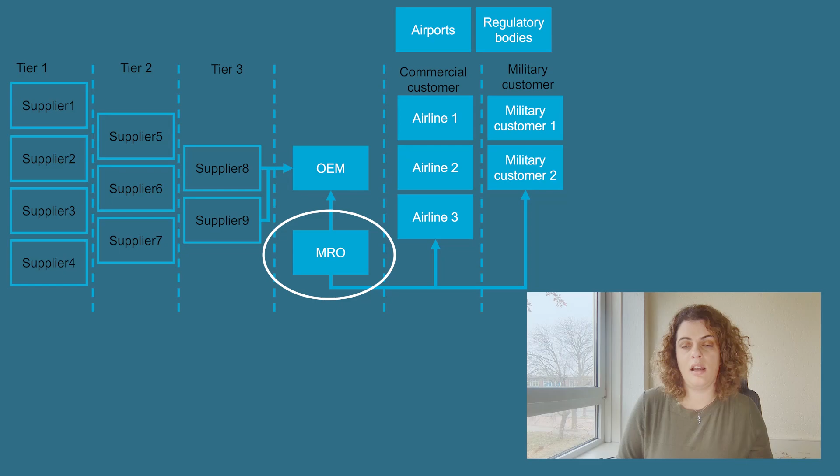In addition to these organizations, we also have the MROs, the Maintenance, Repair and Overhaul independent parties that perform maintenance. Maintenance can be performed in different places, such as by the supplier, sometimes by the OEM, which is not so often, and also the airlines can take that responsibility, as well as the military customers.

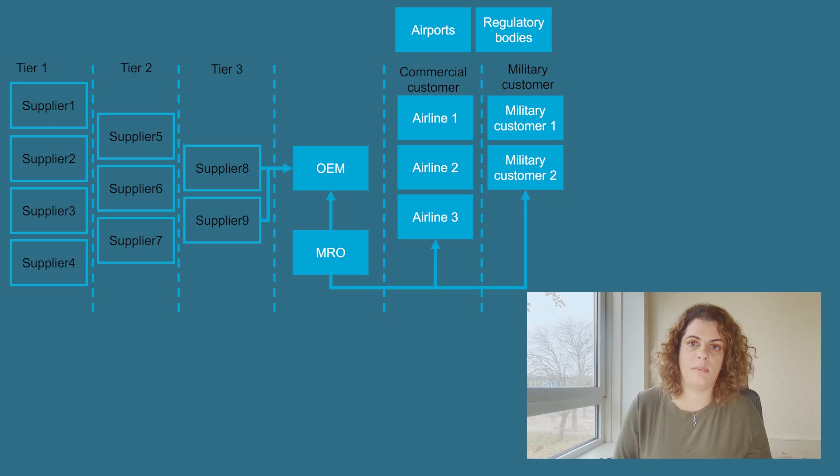After we have laid out the stakeholders, who is who and who does who, it's important to understand the goals and the objectives of maintenance. So all these people are involved in maintenance, but what does maintenance aim for?

As we said in another video, maintenance is a continuous process of operational optimization where you try to balance the costs and the benefits. In that respect, you have three goals in mind: one is safety, the other is availability, and of course the optimization itself.

Safety means that you always target an airworthiness state. Availability means that you try to make the fleet or the aircraft being used at an optimal utilization rate. And optimizing the costs means that you have the lowest possible costs given the highest possible benefits.

If you are curious what costs and benefits mean, well, costs are, for example, the costs it takes to have physical and human resources to do a maintenance task, but it's not only that. The time taken to complete, plan, and schedule maintenance strategies is also considered in the cost optimization. You also have logistic costs because sometimes you have to take spare parts from one side to the other.

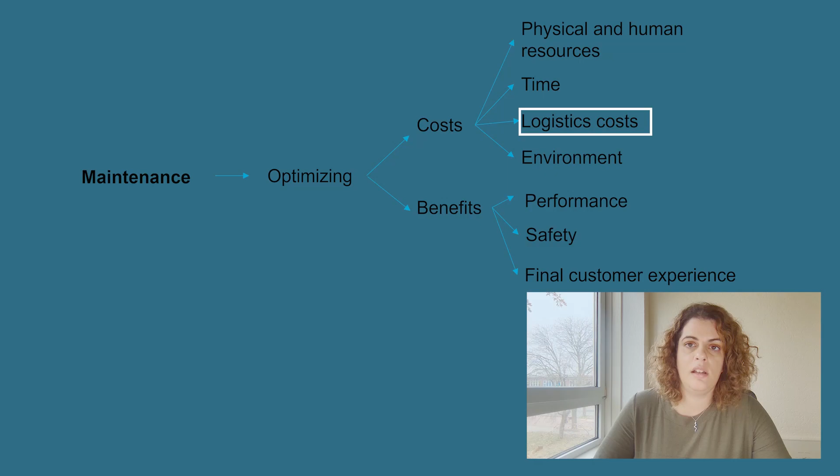And of course, if you perform your maintenance well, everything is going well. But if you don't do that, you will have less performance, less efficiency, and this can, for instance, mean more pollution and less sustainability.

In terms of benefits, we have the benefit of added performance if the maintenance is well performed. We have safety, of course - we don't want the parts to fail while in the air. And overall, we can promote a better customer experience because less disturbance to the scheduling of the customers, of the clients, is incurred.

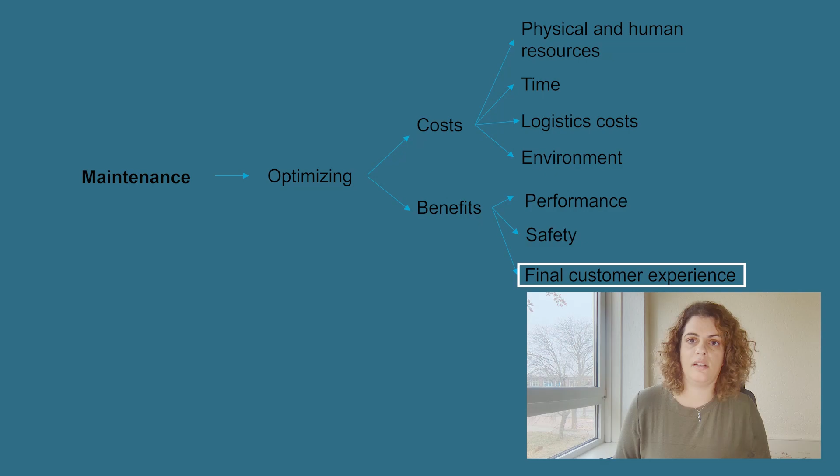A failure mechanism is something that happens way before failure, and it's important to talk about it because sometimes people think that the failure mechanism is the failure, while it's not quite the same thing. So, for instance, corrosion - corrosion starts to happen, and at some point it gets to some degree that you can consider it to be failure.

But the failure mechanism itself, the corrosion, happens often in many different equipments, not just once, not just one, and it ultimately leads to failure of the equipment.

These failure mechanisms, these irreversible changes, can take many names and many forms, such as corrosion, as we talked about, wear - so with time things wear out - accumulation of deformations, distortion due to high temperatures, overheating, fatigue, and sometimes even the diffusion of one material into another.

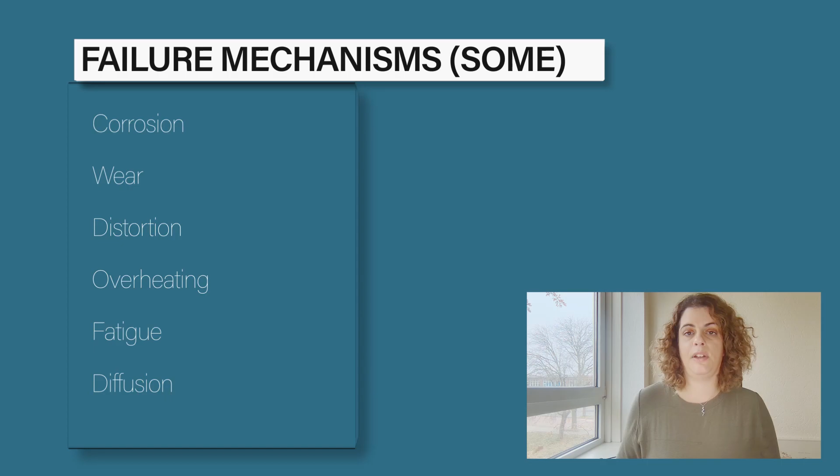So all of these can be considered failure mechanisms. They lead to failure, but they're not exactly failure - they're more the process of degradation. A failure mechanism is very different from a failure mode, in the sense that the failure mode is how the failure happens, while the failure mechanism is what happens before the failure mode, before the failure.

But before we go into depth about what a failure mode is, I would like to talk about performance requirements and operational conditions. These are buzzwords in maintenance that everyone talks about, but when you are new to the field, it's hard to understand what they're talking about. A performance requirement is quite easy to understand - it's a requirement that you define at the design stage that the equipment or system has to meet.

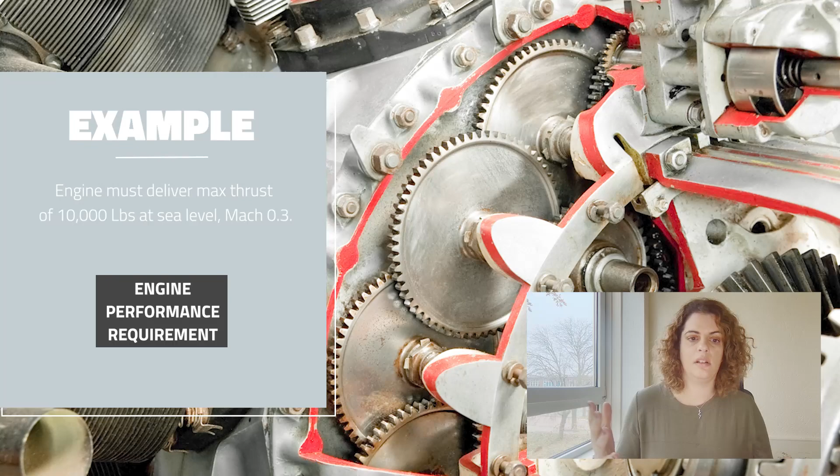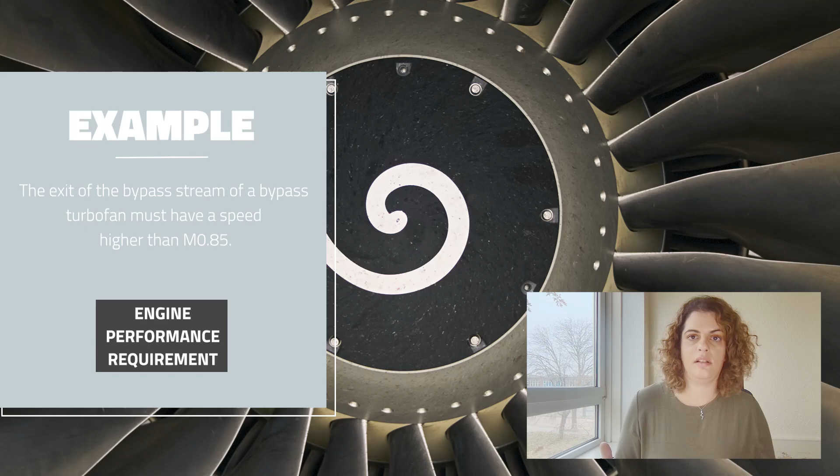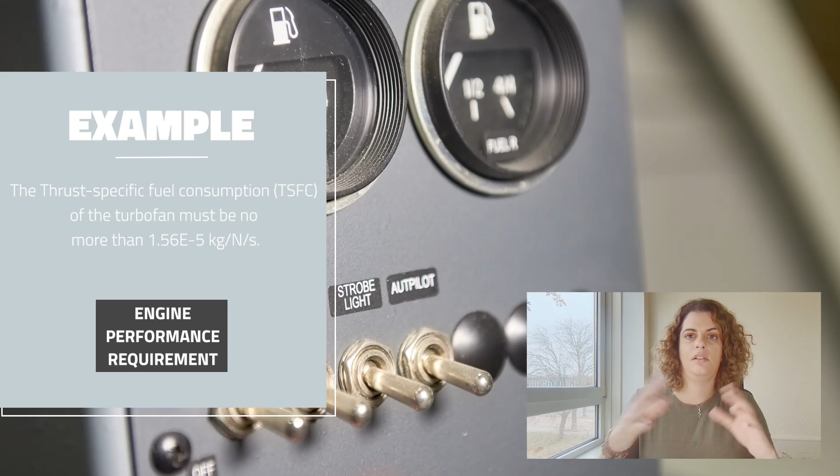So for an engine, you can say that the engine must deliver the maximum thrust of 10,000 pounds. You can also say that the bypass turbofan must have a speed higher than a certain limit. Or you can say that the fuel consumption of the turbofan must be no more than a certain value. These are all performance requirements.

Why? Because once they are broken, below or above, according to the performance requirements, you no longer can say that the system is functioning properly, and you can consider it to be a failure.

But whenever you are talking about the performance requirements, you have to define the environment or the operation boundaries that the system is operating within. So, for example, going back to the performance requirement of the 10,000 pounds, you have to say that this is at sea level, Mach number 0.3.

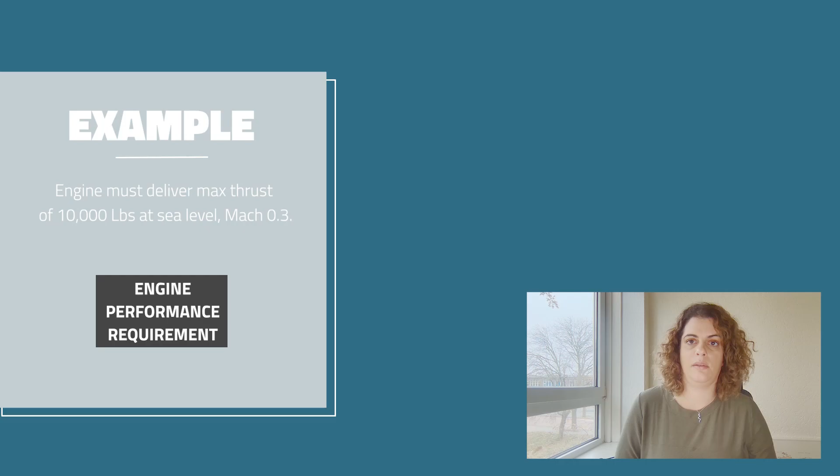Why are the operational conditions so important? Well, it's because a slight change in operational condition, a slight change in speed, for example, completely changes the performance and hence the degradation boundaries of the system. The operational conditions are very important because they can mask the degradation signals.

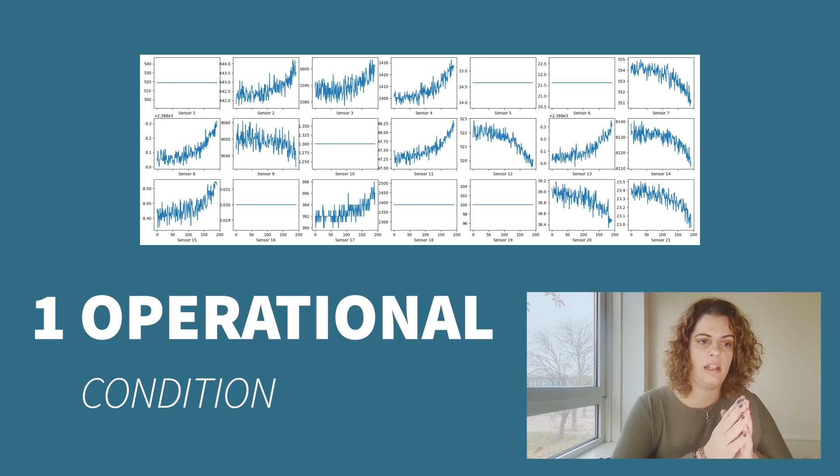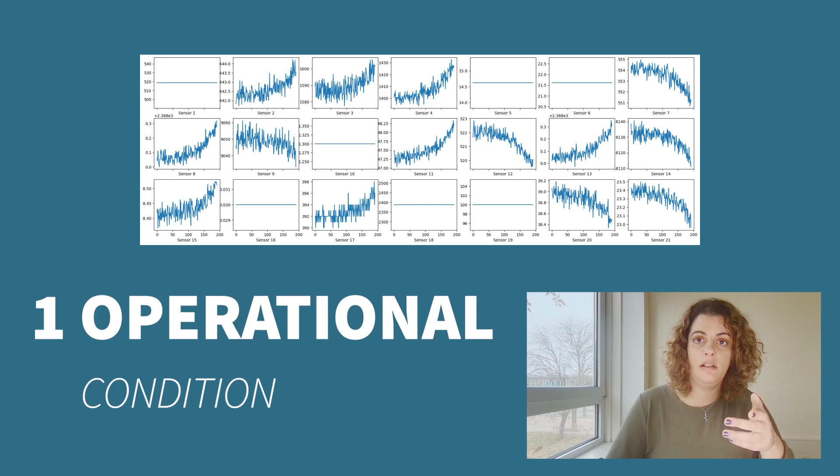So for instance, you see here several signals of the same engine over the course of a lifetime of the engine, and you can see that with some noise you can see a signature, a trajectory that is exponential. And this is very important to determine failure, to diagnose failure and to predict failure ahead of time.

Understanding what the operational conditions are and disentangling their effects can lead to a better understanding of the ultimate degradation signals that the system is subject to. It's not easy to do. There are several techniques, such as different kinds of clustering, that can be applied. But the important thing is to know that the operational conditions have an effect on the degradation signals.

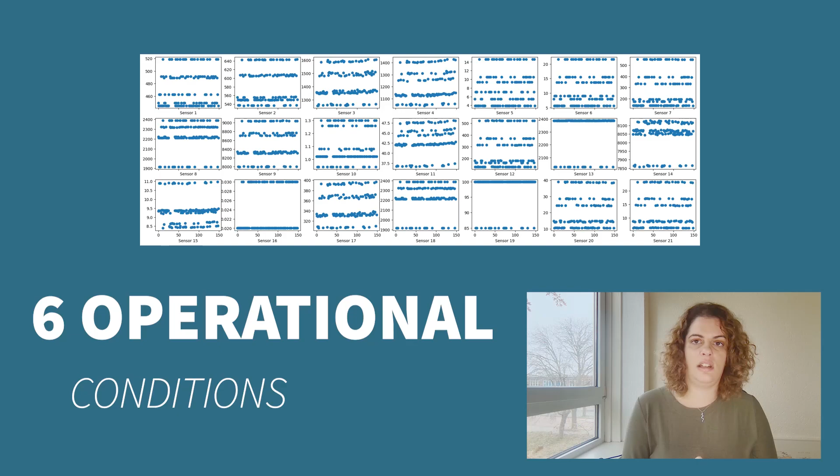Now we are ready to talk about failure. Failure is no more than the inability of the system, the incapacity of the system to meet the minimum acceptable set of functional requirements, of performance requirements, under some predefined environmental and operational conditions. So what does this mean? This means that if you have certain requirements, if at least one of them is not met under certain conditions, then you can say for sure that you have a failure.

Going back to the failure mechanism, we have now the concept of failure mode. So after the failure mechanism comes failure, which can express itself in different failure modes. So the failure mode is the way the system, the unit, fails. So for example, a bearing has different failure modes, and the more complex a system is, the more failure modes it has.

So for instance, a bearing can fail when a ball gets out of round, when the races get grooved, or when things get pitted. Other failure modes are possible, but these three just give you a notion of what a failure mode is.

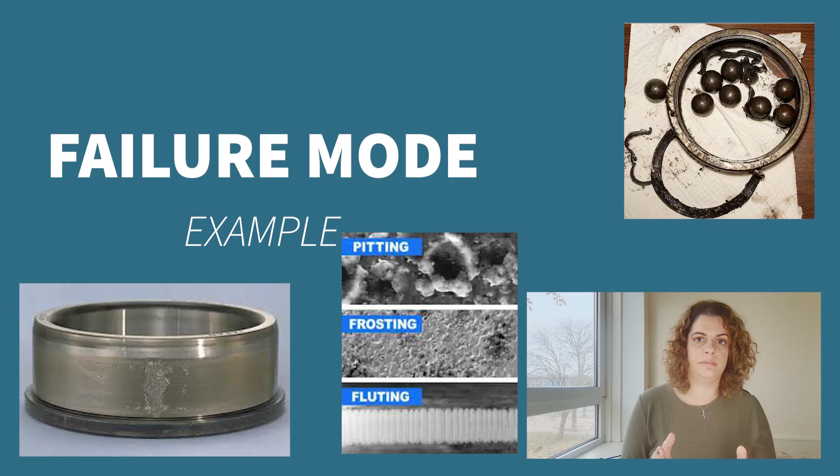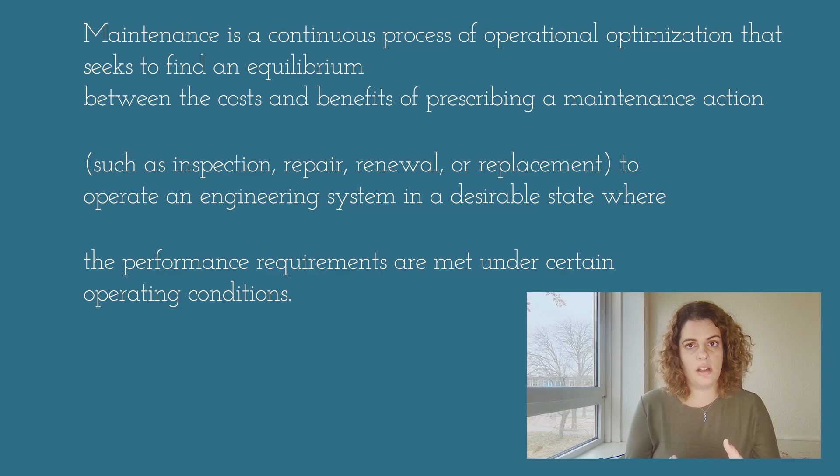With all of this said, we can now go to the maintenance definition. The maintenance definition that we agreed on is that maintenance is a continuous process of operational optimization that seeks to find a balance and equilibrium between the costs and the benefits of prescribing a maintenance action, which can be inspection, repair, renewal, replacement, or other, to operate an engineering system in a state that is considered good, where you meet all the performance requirements under certain operational conditions.

That is all for today. So we defined, listed and distinguished the fundamental concepts of maintenance, such as what is failure, what is a failure mechanism, what is a failure mode, what is a functional requirement, what is an operational condition, what is maintenance, and we listed the stakeholders and the main goals of maintenance. So we talked about different things to make sure that you fully understand the context and the environment where maintenance happens in aeronautics.